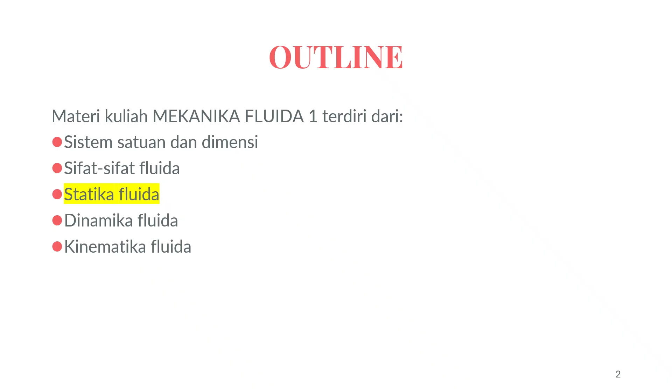Jika kita ingin merancang pintu air yang ada pada bendungan atau dam, maka kita perlu memperhitungkan gaya-gaya yang bekerja pada pintu air itu. Gaya yang bekerja akan berasal dari tekanan air di mana pintu air itu berada.

Ingat ada prinsip hidrostatika, benda akan mengalami tekanan di kedalaman tertentu berdasarkan prinsip dP per dz sama dengan minus gamma. Jadi setiap benda yang ada di kedalaman tertentu akan mendapatkan tekanan sebesar dP per dz sama dengan minus gamma. Prinsip itu digunakan untuk mencari gaya yang bekerja pada suatu benda di kedalaman tertentu.

Di kuliah sebelumnya, Anda sudah tahu bagaimana menghitung tekanan. Berikutnya, Anda harus bisa mencari berapa besarnya gaya pada benda yang ada di kedalaman tertentu itu. Kita akan membahas hal itu di materi hari ini. Jadi, gaya hidrostatika yang kita perhitungkan itu berasal dari tekanan yang bekerja di kedalaman tertentu tadi.

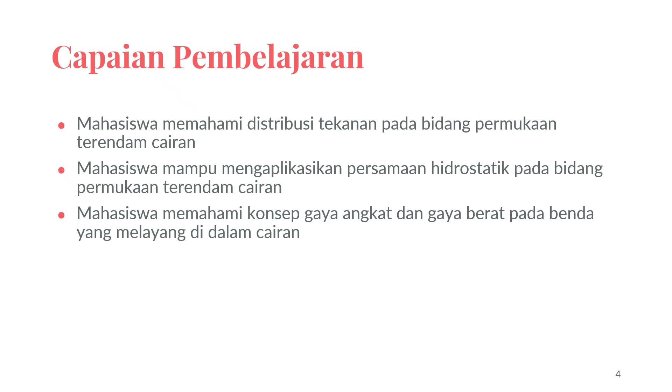Pada kuliah yang lalu, kita sudah membahas tentang gaya hidrostatika. Ingat, gaya hidrostatika adalah gaya yang terjadi pada benda yang berada di kedalaman suatu cairan, yang nilainya bisa kita perhitungkan sebagai gamma dikali dengan kedalaman. Gamma adalah berat jenis dari cairan atau fluida.

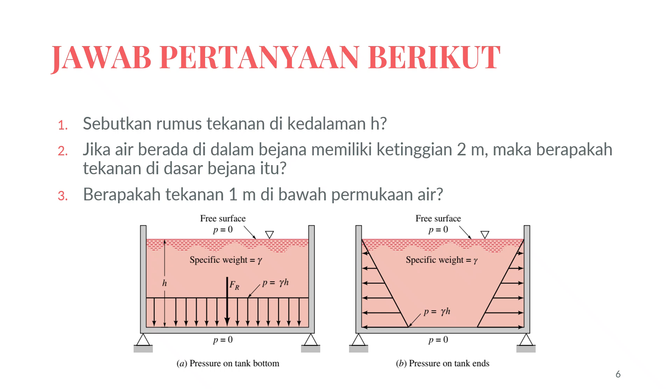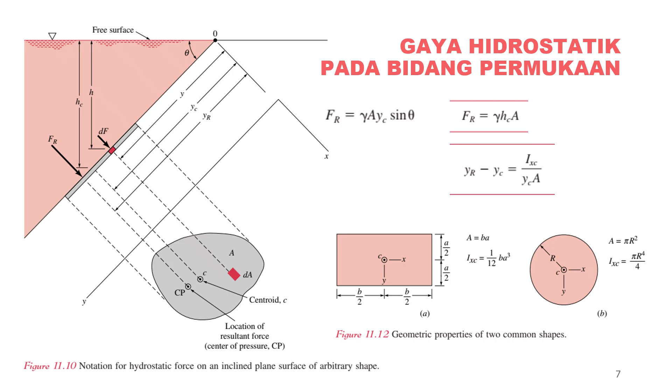In this lesson, we'll derive the equation for calculating the magnitude of the hydrostatic force on a plane surface. Here we have a rectangular fish tank filled with water to a depth d. In order to determine whether the fish tank walls can support that much water without breaking, we would need to know the total force exerted on the walls.

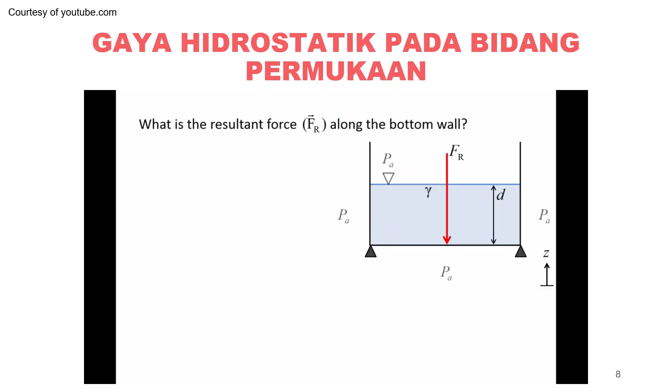First, we will determine the resultant force along the bottom wall. The tank is surrounded on all sides by the atmosphere, which has a pressure Pa. On the underside of the bottom wall, which is exposed to the atmosphere, the pressure force is Pa times the area of the bottom wall, and this force points upward.

Inside the tank, the pressure force increases as one descends through the water, reaching a maximum at the bottom of the tank. The absolute pressure at depth d is the atmospheric pressure plus the specific weight of the water times the depth. This creates a downward force on the wall equal to Pa plus gamma d times the area of the bottom wall. If we examine just the fluid pressure forces acting along the bottom wall, the resultant force is Pa times the area of the bottom wall minus the quantity Pa plus gamma d times the area of the bottom wall. The atmospheric pressure terms cancel out, and we are left with negative gamma times d times the area. This means that the resultant force points downward with a magnitude of gamma times d times the area.

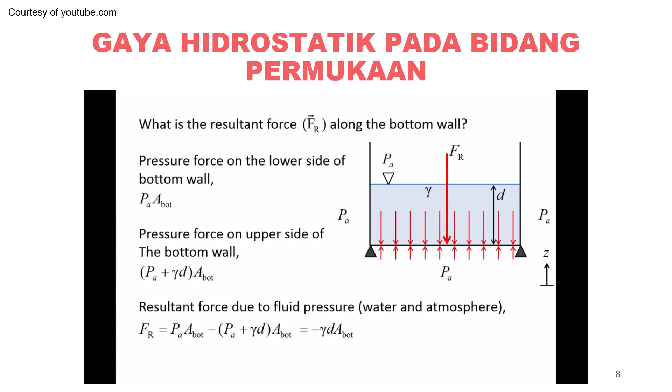Finding the resultant pressure force along the bottom wall was relatively easy because the pressure is constant along the entire wall. This is not the case for the side walls. The pressure along the exterior of the side walls is Pa, and the related pressure force is Pa times the area of the side wall. However, on the interior of the side walls, the pressure increases linearly with depth. At a depth h, the pressure is the atmospheric pressure plus gamma h. We want to determine the magnitude of the resultant force caused by the fluid pressure on the side walls.

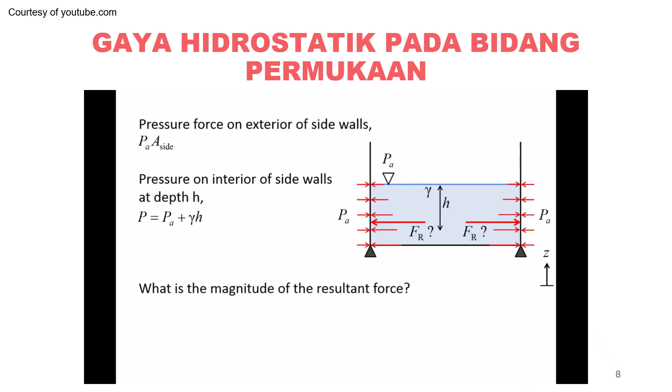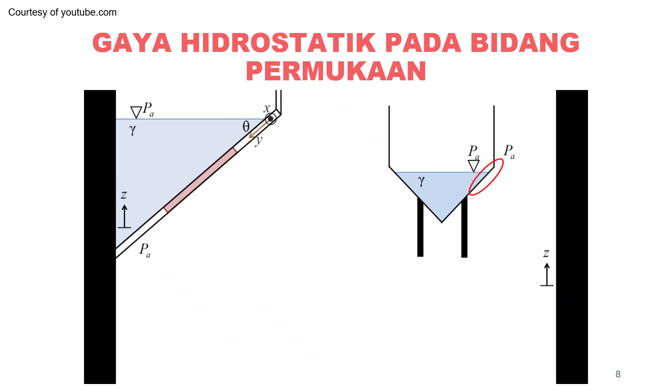Here is a different tank. This tank is open to the atmosphere and partially filled with a liquid of specific weight gamma. We are going to examine a section of the flat wall that's highlighted in pink, which has an arbitrary shape and which is oriented at an arbitrary angle theta relative to the free surface. We set up a coordinate system where the x-coordinate comes out of the screen and is oriented along the free surface. The y-coordinate is oriented along the section of wall we wish to examine. We will need to examine some important points on the wall, so we rotate the surface 90 degrees about the y-axis to get a better view.

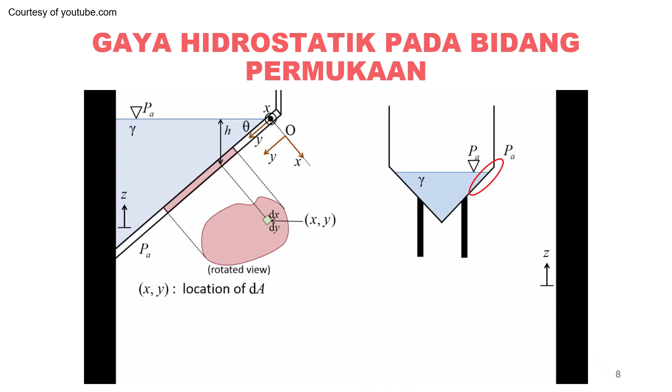Point xy is the location of some arbitrary small area dA on the wall. dA is the area dx times dy and is at a depth h from the free surface. Point C is the centroid of the wall and is located at coordinates xc, yc. The depth of the centroid from the free surface is hc. The centroid is the geometric center of the wall, and the centroid and center of mass are the same if the density of the wall is constant. Point CP is the center of pressure, which is where the resultant force Fr acts. The coordinates of the center of pressure are labeled as xr, yr. The resultant force and center of pressure location produce an equivalent force and moment on the wall as the original fluid pressure field.

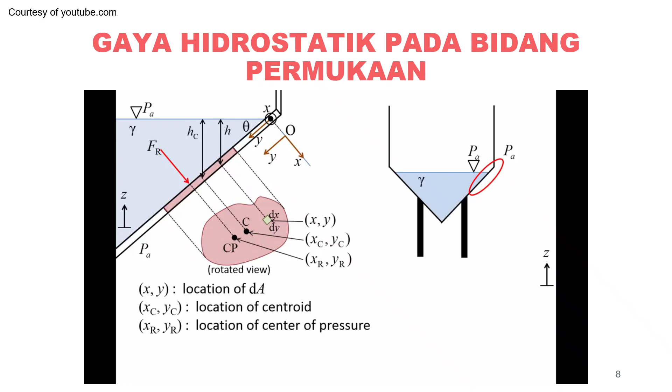In order to find the resultant force over the entire highlighted surface, we will start by examining the force at the location of dA. The small pressure force on the exterior of the wall at area dA, labeled dF ex, is the atmospheric pressure Pa times the area dA. The small pressure force on the interior of the wall at area dA, which is labeled dF in, is the fluid pressure at dA times the area dA. The pressure at that depth is the atmospheric pressure plus gamma h. Using trigonometry, h can be rewritten as y times sine theta. The net force due to fluid pressure at dA is dF interior minus dF exterior.

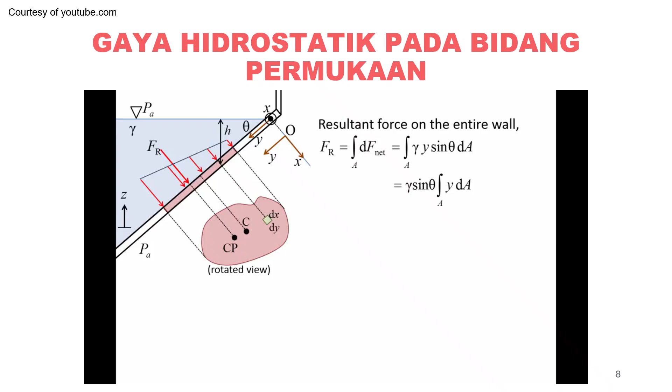After plugging in the expressions for the two forces and eliminating Pa times dA, we obtain gamma times y sine theta times dA. To find the resultant force caused by fluid pressure on the entire wall, we integrate dF net along all points of the wall. We plug in the expression for dF net and pull gamma sine theta out of the integral because they are constant. The integral of y dA can be simplified if we recall the definition of a centroid. The y-coordinate of the centroid, yc, is the integral of y dA integrated over the entire surface divided by the entire surface area A. We now have an expression for the resultant force Fr. Fr is equal to gamma times sine theta times yc times the area. Yc times sine theta is equal to the depth of the centroid, hc, so we can rewrite the resultant force equation as gamma times hc times A.

This form of the equation is often more convenient to use when solving fluid mechanics problems. Gamma hc is the pressure at the centroid, Pc, so we can further rewrite the resultant force equation as the pressure at the centroid Pc times the area A.

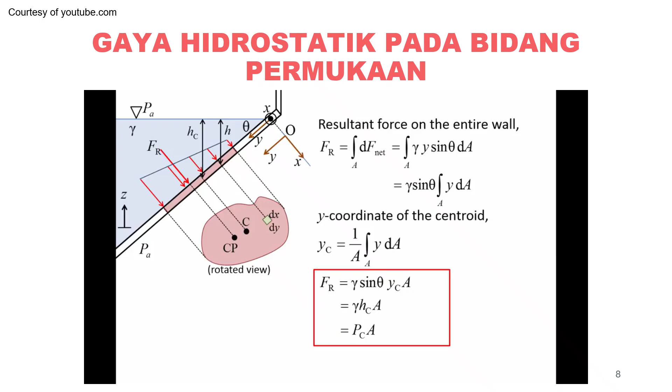These equations are valid for any flat surface in which the free surface of the liquid and the side of the tank are both exposed to the same pressure. In this case, they're both exposed to atmospheric pressure.

We are free to use either yc or hc to find the resultant force, and it's important to understand the difference between the two quantities. hc is the vertical distance from the free surface to the centroid, and yc is the distance from the free surface to the centroid as measured along the orientation of the wall. If the wall is oriented at an angle less than 90 degrees relative to the free surface, hc will be shorter than yc. If the wall is vertical and theta is 90 degrees, hc and yc will be the same distance, and in both cases the distance yr will be greater than yc.

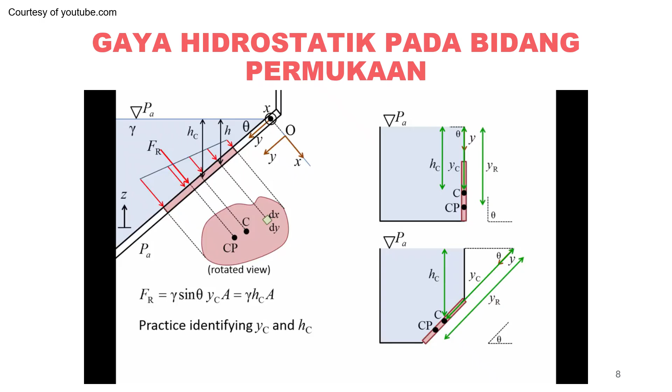Although not proven in this video, if the tank is pressurized to a gauge pressure of P0, the equation for the resultant force would need to be modified to gamma sine theta yc plus P0 times the area A, which can be rewritten as gamma hc plus P0 times A.

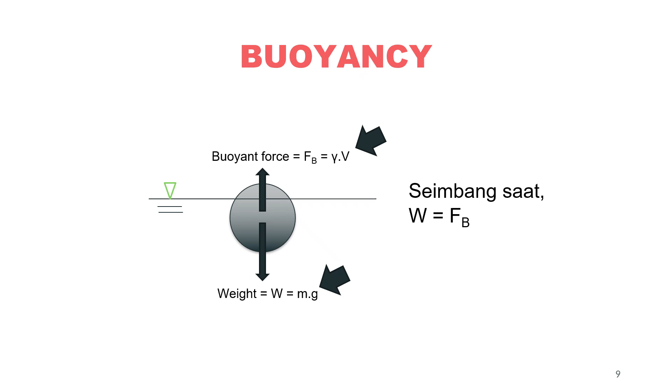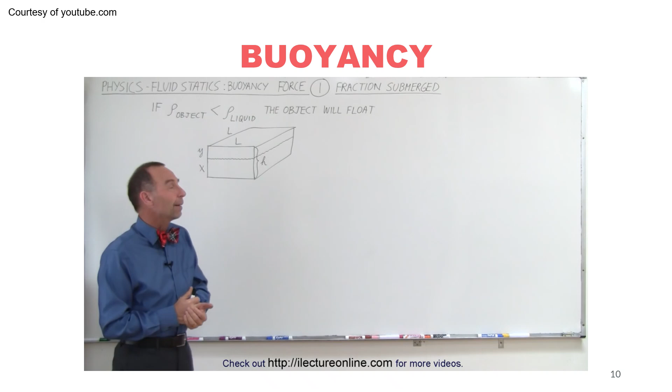For example, if we have an object that actually is floating, doesn't sink to the bottom, and we want to figure out what percentage or what fraction of the object will be below the surface and what fraction will be above the surface, we have some special techniques in order to figure out how to do that. And so in this case, since we're looking for what is x equal to, x being the fraction of the object being submerged below the surface, how will we go about figuring that out?

Well, first of all, we need to understand that if the density of an object is less than the density of the liquid, then the object will float. Like ice, wood typically will float in the water with a small portion of it above the surface and some portion below the surface. We still keep the same definition to figure out how to do this by saying the buoyancy force, and I'll write the buoyancy force as BF, makes it easier than to write it out like that.

The buoyancy force is equal by definition to the weight of the displaced liquid. So in this case, the displaced liquid is probably water, but we can simply generalize it by saying the displaced liquid.

And of course, we can also write the weight as being the mass times acceleration due to gravity. And since we have the definition of the density being equal to the mass divided by the volume, we could also write the mass as simply being the product of the density times the volume. So this can be written as the density times the volume times g, where the density is going to be the density of the liquid, and the volume is going to be equal to the portion that is submerged below the liquid, so portion submerged.

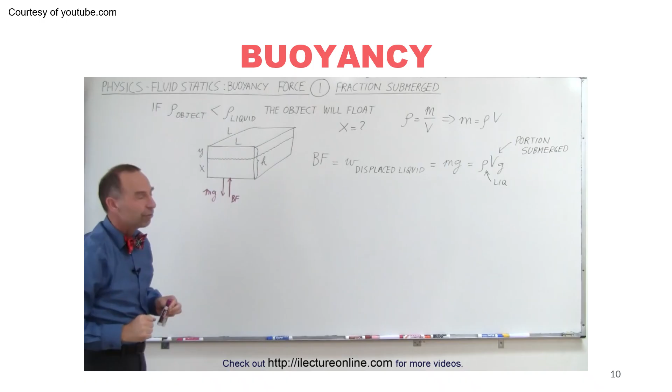At that point, the object will be floating. We can also say, because of this, that the buoyancy force is equal to the weight of the object. So in this case, when an object floats, and of course we can only say this when the object is floating, because if the object doesn't float and it sinks to the bottom, the buoyancy force is going to be less than the weight of the object. But in the case that the object is floating, we can also say that the buoyancy force is equal to the weight of the object, which is equal to m times g.

And of course, we can do the same thing as we did for the liquid. The mass can be written as the density times the volume times g, where in this case this is the density of the object, as opposed to the density of the liquid, and the volume is the volume of the object.

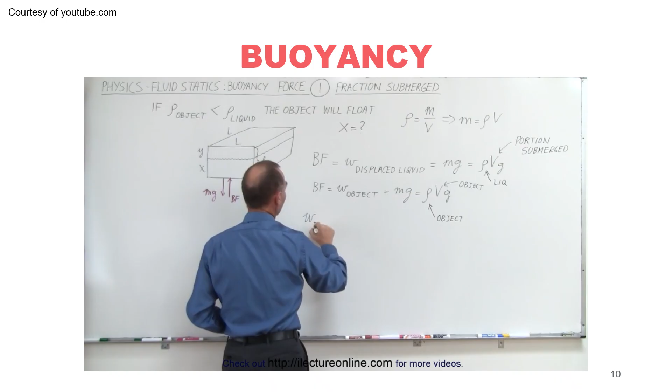Now what we can do is set those two equal to one another. We have to be careful to use the right subscript so we can keep them separate. So we can say that the buoyancy force, which is equal to the weight of the displaced liquid, is equal to the weight of the object. The weight of the displaced liquid can be written as the density of the liquid, density sub L for liquid, times the volume of the displaced liquid. I'll say volume sub L, meaning the volume of the displaced liquid, the portion of the object that's submerged, times g, is equal to the weight of the object, which can be written as the density of the object, times the volume of the object, times g. That's how we can keep the two separate.

Right away, we realize that g can be canceled out on both sides of the equation. Then I can substitute for each of these volumes what those volumes are equal to. The volume of the displaced liquid is this region right here, assuming the cross-sectional area looking from the top is L by L, so that would be a square object to make things easier. We can say this is the density of the liquid times L squared times X.

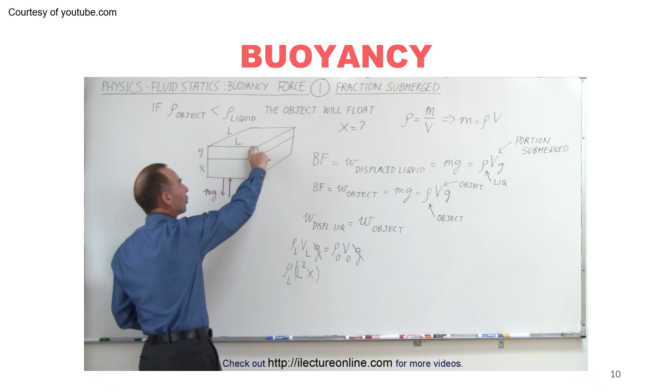X would be the portion in the vertical direction that is below the surface. H is the total height or thickness of the object, Y being the portion above the surface or above the liquid. This is equal to the density of the object times the volume of the object. In this case, that would be L squared times H. And of course, we already canceled out the g's. Now we can see that on both sides of the equation, I can cancel out an L squared.

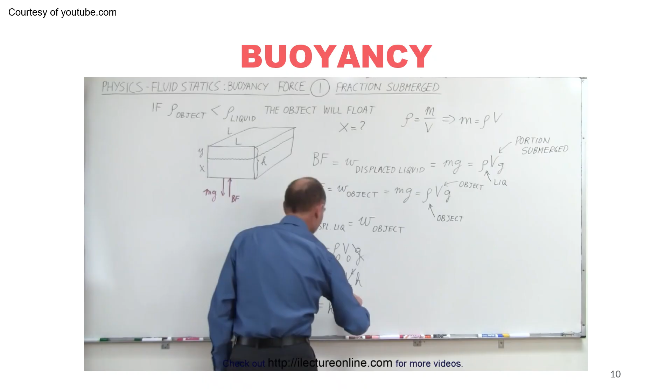And then if I want to solve this for X, I can say that X is equal to the height or thickness of the object times the ratio of the density of the object divided by the density of the liquid. Let's put a box around that. So that's how we find the portion that is submerged: simply the height or thickness of the object times the ratio of the density of the object divided by the density of the liquid.

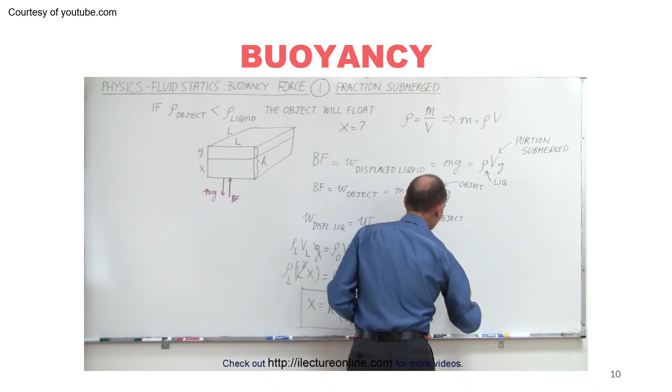Remember that when it floats, the density of the object is smaller than the density of the liquid, so this fraction is less than 1, and so X is only a fraction of H, a fraction that's smaller than 1. We can also write it as a ratio: the ratio of X to H is equal to the ratio of the density of the object divided by the density of the liquid. That's another good way of expressing how much of the object will be below the surface compared to the whole thickness of the object.

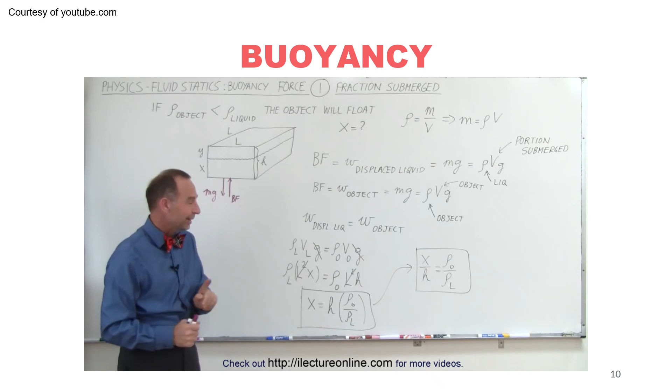And that's how we calculate the portion of an object that's submerged below the surface if the density of the object is less than the density of the liquid. And that's how it's done.